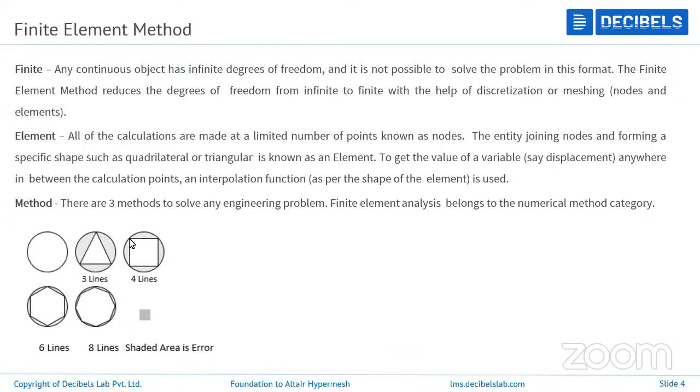For a CAE simulation to run any analysis, more than 60 to 70% of the work will be done in HyperMesh only, starting from importing the CAD. In any CAE software, we are not creating any CAD. We are bringing the CAD from software in which it was already built, the design software.

Say for example, CATIA, Unigraphics, or Solid Edge. We are importing or bringing the CAD to HyperMesh. After importing the CAD, we do geometry cleanup, the required defeaturing or simplification. There are different criteria based on the project requirement or the analysis requirement. Based on that, we are going to simplify the geometry according to our requirements.

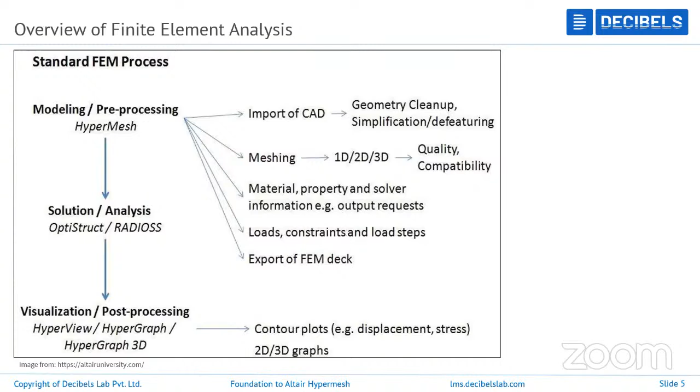This is an overview of the finite element analysis that every CAE industry is following, from pre-processing to post-processing. Next, we'll move on to why we need to do all these activities. In the past, without these activities also, we were building models, and automotive manufacturers were there. But why do we need it? What is the major advantage of using finite element analysis?

So, for example, you are doing some crash test. For the crash test, obviously, you need a prototype where everything should be as per the new car. Say, for example, you are doing some crash test for the car. So everything should be modeled as per the newly designed car.

So if the physical test or the prototype test is failing, again you need to go back to designing the CAD, where it went wrong, why it is not taking the crash load, or why it is not failing within the certain defined time range. So all these things we need to check again. After checking, if it's a fault by the design engineer, obviously it will go for a new design, or redesign.

But after the evolution of the CAE software, what we can do is we will build the model in the design software. We'll do the virtual test using the CAE software. In the CAE software, as I said, take an example of a crash test.

If you're working on the crash test, for doing any CAE simulation, we don't require any prototypes, or any physical model. What we need is the design CAD, the material data, the load conditions and the boundary conditions. We will apply all those things, run the file, and extract the results. In the CAE software itself, you will get to know the stress values or strain values, all the details.

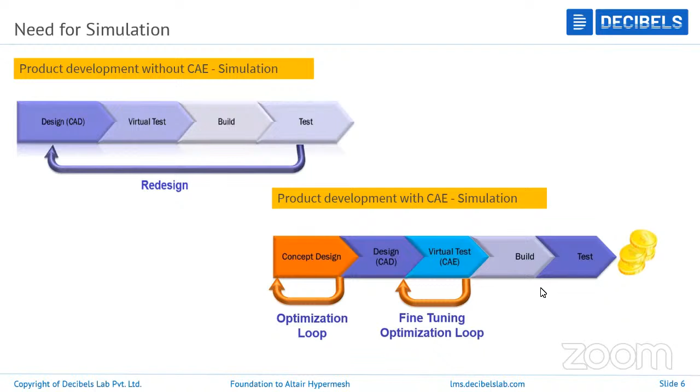Or you can change the thickness or width of the component, or change any design CAD data, or you can try redesigning the same data. Everything can be done in the CAE software only. By using the CAE software, obviously you are going to save your time, money, and manpower. These are the main advantages of using CAE.

But if you are working on CAE, you can define the different materials, and you can check the deformation plots before manufacturing: which load it can take, the displacement values and all, you can check it.

But without using any CAE software, if you are going directly for the physical test, obviously if it fails even a single test, you need to come back and redesign or change the design. Or if the materials are not good, you need to deal with that.

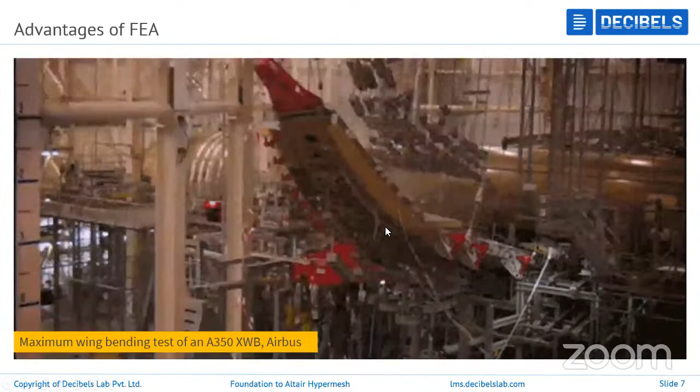Even if you are using the same steel material, there are different grades, there is a different yield of the material, so you need to check everything. But using a CAE software, that is a simulation software, you can overcome all these problems.

These are practical examples by which you can understand the main advantages of using FEA. These are the theoretical aspects you should know before doing any FEA analysis or FEA simulations. Let's get started with HyperMesh. The HyperMesh window looks like this.

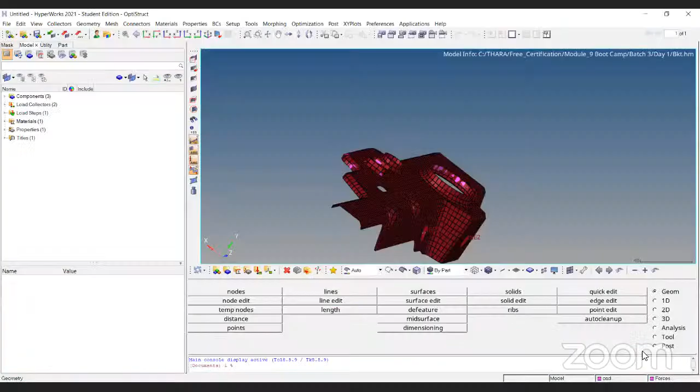As we can see, this is the title bar, these are the menu bars, this is the graphical user interface, and there are different menu pages available. When you open any HyperMesh window, it looks like this. This is the title bar. In the title bar, you can see the version of HyperMesh you are using. I'm using the 2021 version.

Below the title bar, you can see different options: file, edit, view, collectors. These are called the menu bars. In the menu bars, different options are available. If you want to create a new file, open an existing file, save, import or export, those things are available in the menu bars. This is the menu bar, and this is a toolbar.

The blue screen is called the graphical user interface. The empty blue screen you see in the window is the GUI of HyperMesh, where all your activities are implemented. If you want to change something, create elements, view a component, or do any activity, everything will reflect in this screen.

These are the peripheral icons of HyperMesh, and these icons are also available as function keys, the keyboard shortcut keys. And these are the different menu pages. As the name indicates, the best way to use HyperMesh is by the name itself; it tells us what operation it was built for.

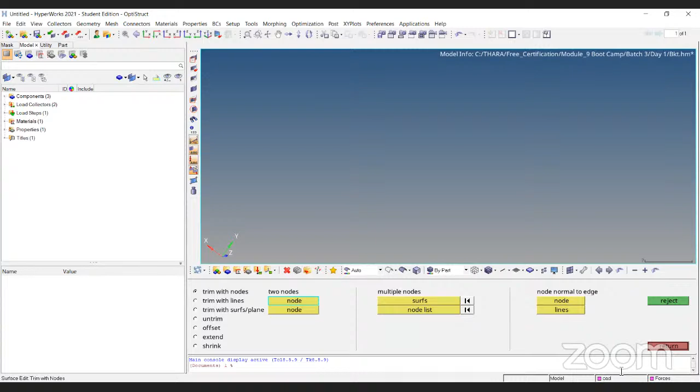These are the different options available in HyperMesh. The main thing here, on the left of this box, is called the model tree. The model tree - the main thing - like if you go for any component, this is the model tree. It contains the models, properties, materials, load collectors, system collectors, property details, any load details, control cards, everything available in the model tree.

As the name indicates, any one model, or any single component - all the details of that component, starting from the element to the node ID to the name of the component - everything is available in the model tree. This is called the model tree. The left side which you are seeing is the model tree.

If you click on anything, like the components, at the bottom we can see some options. I'm going with this first component, see, it will show the bracket name. This is the name of the bracket, this is the ID of that. This is called the entity editor.

These are the model tree. The model tree means every detail or anything that this particular file contains will reflect here only. All the things reflect here. But if you want to edit something, you can take this to the entity editor and do the activities.

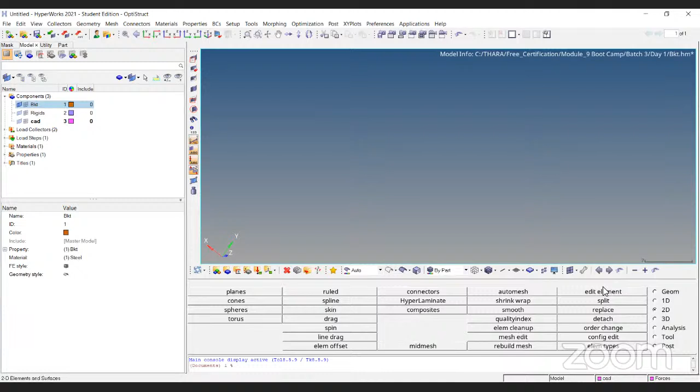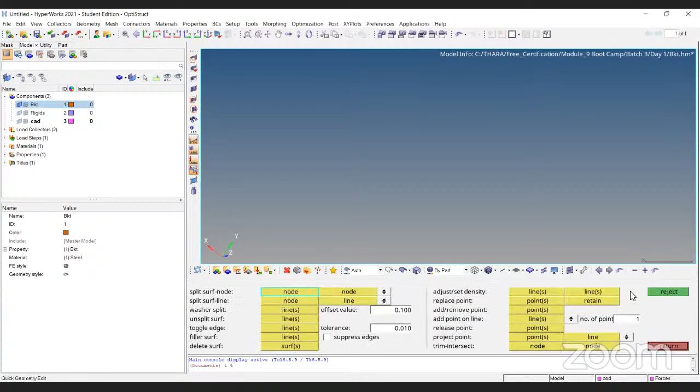In HyperMesh, there are 24 shortcut keys, starting from F1 to F12 plus Shift F1 to Shift F12. These are the main functional keys - all these operations we see in the quick edit panel are also available as shortcut keys. To do meshing, or to create or project anything, those are available in these panels, and also available via the function shortcut keys.

We'll move on to the next slide. We have learned this is the model tree. As I said, it contains the solver information, the material information, and this is the entity editor. So all these are available in HyperMesh.

What is geometry, and what are the different kinds of geometry we can import into HyperMesh? As I said, HyperMesh is a solver neutral software, so we can import from a few of the major design software packages. Importing means I'm bringing in a CAD model already built in design software. Here, the green arrow indicates bringing something into HyperMesh, while the red arrow points outward, meaning I'm exporting.

For importing, there are different options - you can import the assembly, or import only the solver deck, meaning you can import only elements, or else you can import the CAD geometry. In the CAD geometry, you can import the IGS file, the SolidWorks file, the STEP file, CATIA file, or Unigraphics file.

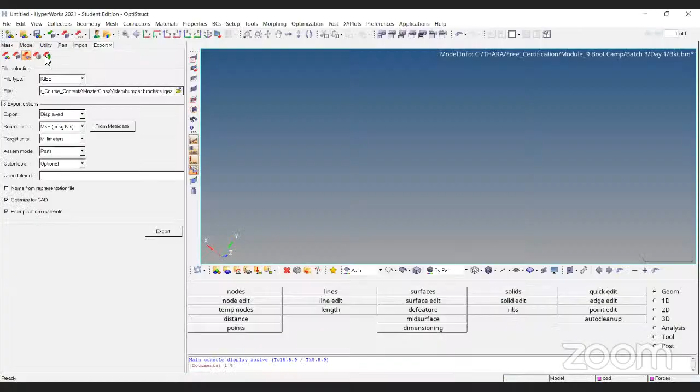As you can see, this is an empty window. I'm just opening one CAD file. This is how the CAD looks, as you can see on my screen. This is one of the simple brackets, I'm going to show you.

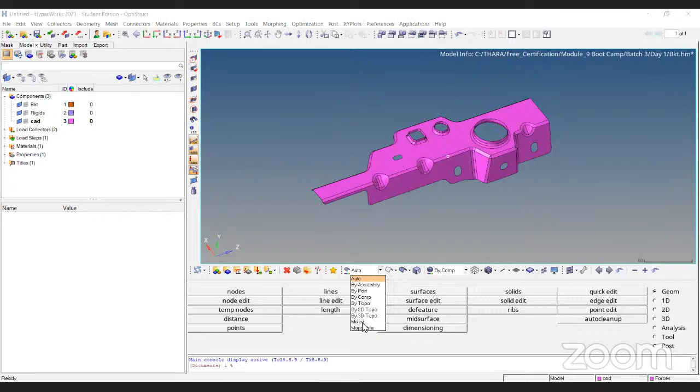I'm going to keep it in a mixed view to represent the geometry lines. As you can see here, you can see two kinds of lines: the red lines and the green lines. The red line indicates it is a free edge.

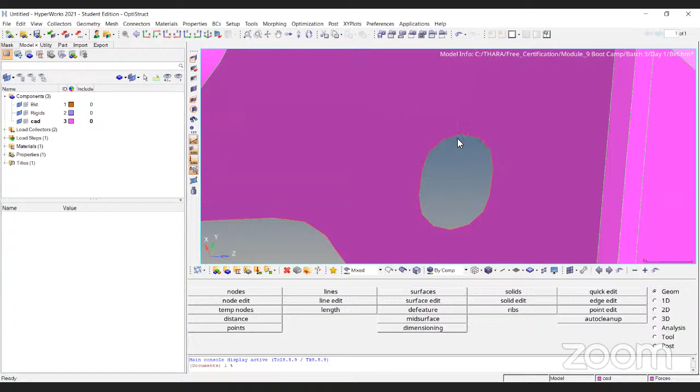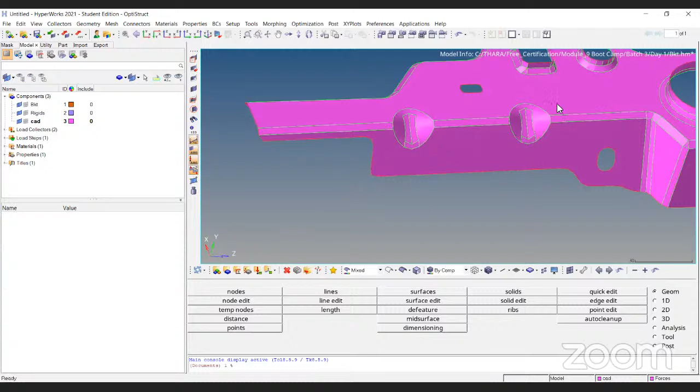This is a free line of the component, meaning inside it's hollow or empty - a free edge. Whereas the green line indicates this is shared between two surfaces. To differentiate the geometry: if it's green, it's shared between two surfaces, and if it's red, it's a single surface.

This is how the element looks. These are the elements built in HyperMesh. As I said, these are called the nodes - the yellow ones are the nodes.

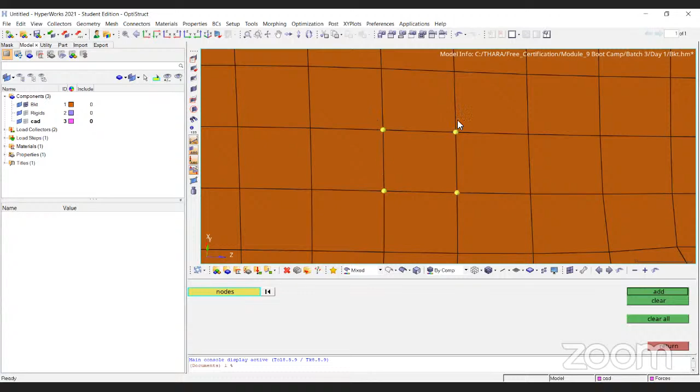This is a four-noded element, and this is a three-noded element. This is called a tri-element, which is a triangle, and this is a square or rectangular element.

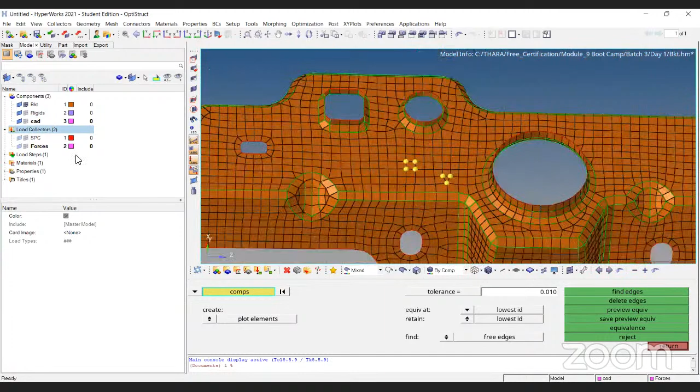If you come over here, it contains the load collector, the load steps, and a material. If you switch on and click on that material, all the details are available - Young's modulus, Poisson's ratio, and the density of the material. So every detail is available here.

First of all, we should know how to rotate or zoom the component. I'm using the control button along with the mouse right button to move within the panel area. If you use control plus left button, you can rotate it.

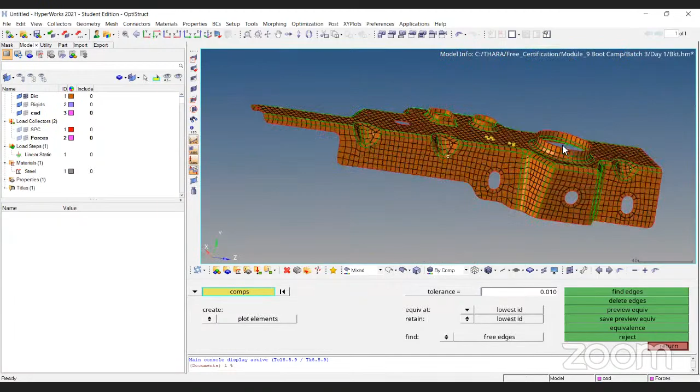You can rotate it. And if you want to zoom in and zoom out, just press the control button along with the mouse middle button. If you scroll the mouse middle button, you can zoom in and zoom out.

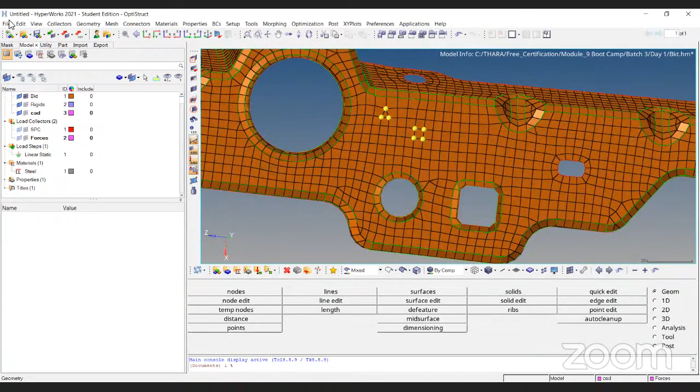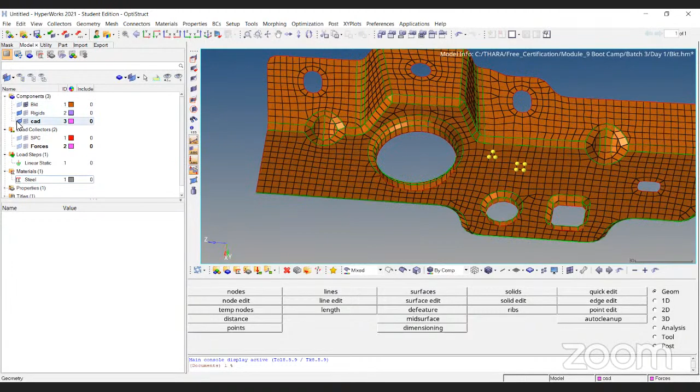Now we know how to import the file, how to rotate the component, and how to zoom in and out. You can play around with this GUI of HyperMesh. We have learned what things are available in HyperMesh and what any component may contain - this is the element view, and this is the geometry view. So all of these are available in HyperMesh.

Next we'll move on to topology. What is topology and why it is required, we'll discuss in HyperMesh only. I'll open the new file.

If you open any CAD, first we need to review the CAD thoroughly before taking it for topology correction. Topology means, as I said, we are not creating any CAD in HyperMesh. We are taking the CAD from some other design software. After taking that CAD, we need to review it before meshing. Let's see what checks need to be done.

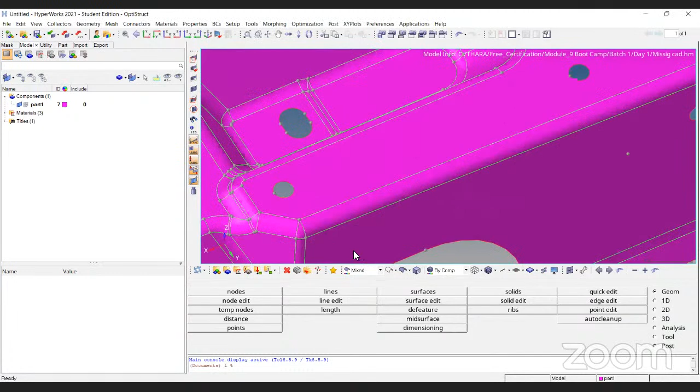I'm keeping it in a mixed view for the geometry representation. If you keep it in a mixed view, you can see what are the free edges or the shared edges. Those things we can differentiate.

In topology correction, what we need to learn is, see here, surface is missing. Here you can see some surface is missing, but I feel it is a missing CAD. Here surface is not there - it could have a valid reason that this feature ends here, but if the surface is not here, it means it is a missing CAD. This comes under topology corrections.

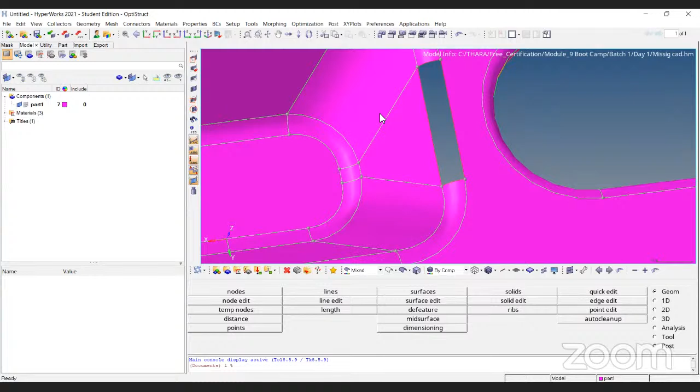Basically, topology correction means we are going to correct the geometry, or modify the geometry, or create washers, or simplify the geometry - that comes under topology corrections. We'll do some small activities using topology correction.

As the name indicates, topology means not changing the shape or changing the size. Here I'm not doing anything, I'm just modifying the geometry. See here, the CAD is missing, so I need to create some surface.

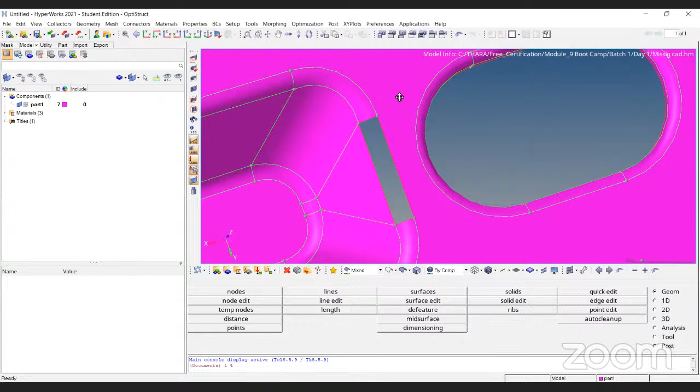Before generating the meshing also, some corrections, simplification, or modification is required for every component. Every component has to be corrected before taking it for meshing. Why? Because even if you don't clean the geometry, you can still generate elements and finish the component. But what matters is the way the geometry is - likewise only we will get the elements.

If the geometry is good, obviously we will get good quality elements. If the quality of the elements is good, the results will be as per our requirement. The results of the analysis are directly proportional to the quality of the elements. It all depends on how good the elements are - like that only you will get the corresponding results.

How will we get good quality elements? Obviously our geometry should be very good. How to get a good geometry? By doing topology correction, modifying the geometry, or making the required changes to the geometry, we will get good elements. Then good quality elements, then we can get good analysis results also. So one leads to the other - it is interlinked between one and other.

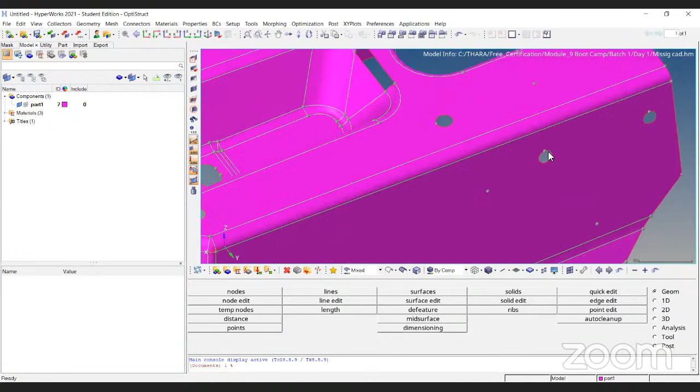So here we need to create a CAD - the yellow ones are the nodes, and the gray ones are called the points. See, there are free points here - this needs to be removed. And here some circles are there, and we need to create some circles. And here also some missing surfaces are there, so we need to create the missing surface.

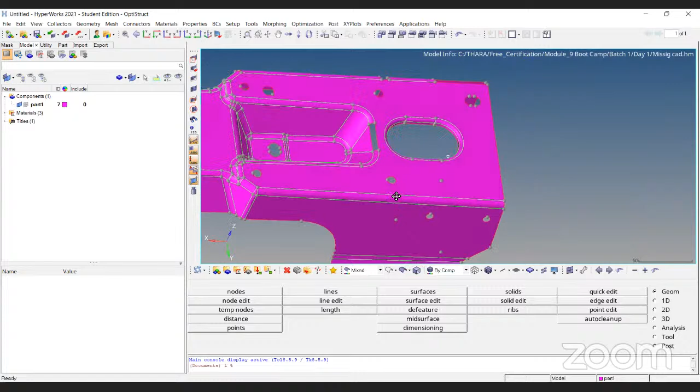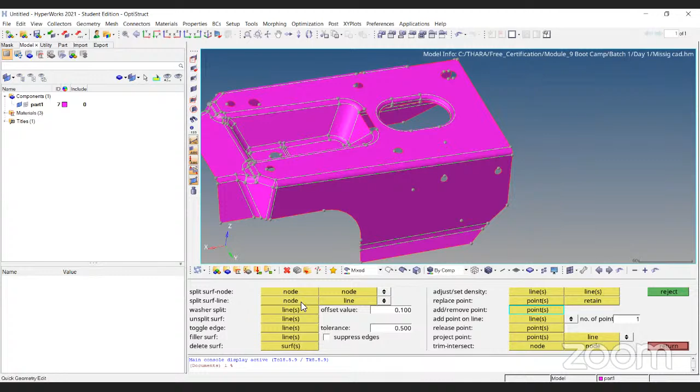Starting from split surf, I'll show you. If I want to cut this line, I just go on selecting one node and I'll do it like this - from here to here, if you want, you can do it. If you want to cut any lines, you can cut the lines like this. This works as per the node.

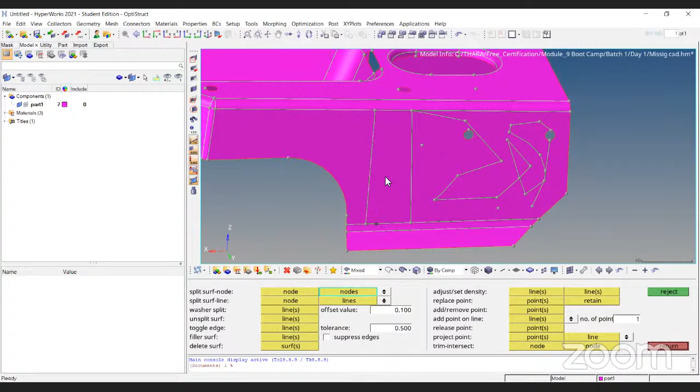But if you switch on to the lines, select a node. I'm choosing this as a node and giving the destination here - perpendicularly, it will split. But if you're selecting randomly, if you want, you can use this one. So these are the basic things we should know.

Then we'll move on to creating the surface. How to create the surface? You can go by surfacing - select the nodes in whichever axis you want, or in the global axis, or by creating a local axis. I'll create the surface using the 2D option, going to the panel called ruled. If you click on the panel ruled, a sub-panel will open. Here I'll choose a line, and here also a line. I'm keeping it so I want only the surface, so I'm switching this to surface, then choose the lines.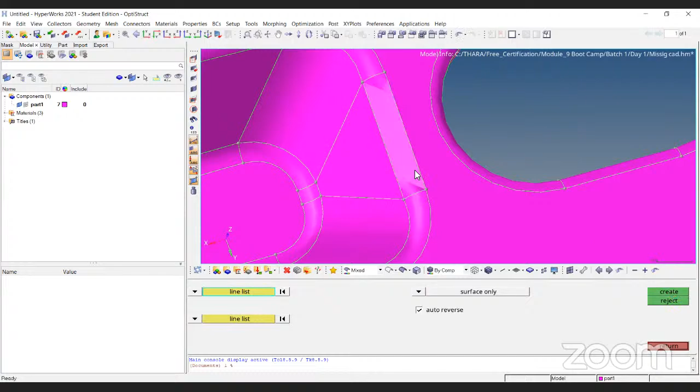Choose the lines. Choose the line list and create the surface. See, surface is created. So like this, you need to think, okay, where are the surfaces missing? You need to create the surface like this. Or if the surfaces are not missing, or if really that is a missing CAD, go by creating the surface. Or else, if the surfaces are like this, there is a valid reason that here some circles are coming.

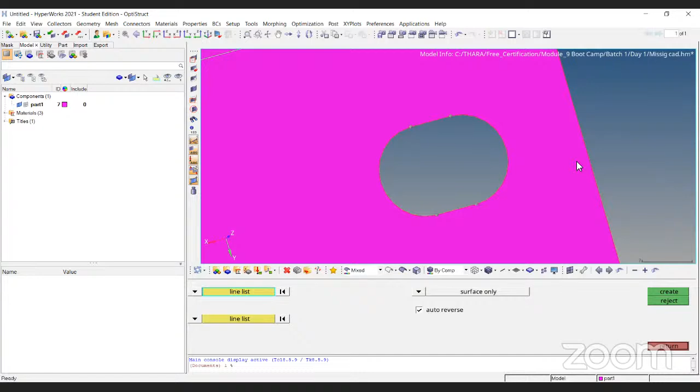If the circles are coming, it means it might be a bolt hole, where bolts may come, or nuts may come, any screws may come. Say for example, in our academics we have studied M10 bolts, M12 bolts. To represent the bolts, these circles or these holes are there. This might be a normal hole and this might be a bolt hole. But there are different procedures for the bolt holes. What that means, I'll tell you.

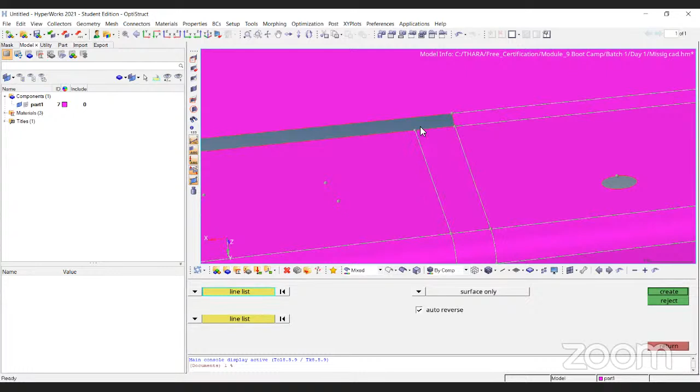See, this is how we need to create the surface. I'll finish off this one. See, like this, you need to choose the lines and you need to create the surface. See, we have created the surface. We'll move to the circle side. Say, for example, it is a bolt hole. So, how to represent a bolt hole?

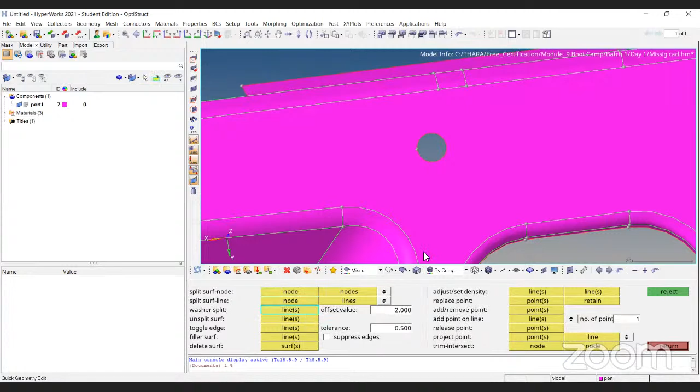For the bolt hole, we are going to create one washer. Why it is required is because obviously there are the most stresses there all the time. There is stress in the bolt. So, we are going to create one washer. So, choose some washer diameter and create the washers like this. This is an elliptical hole. This is a normal circle. This is an elliptical circle. So, wherever you want, you can create the washers.

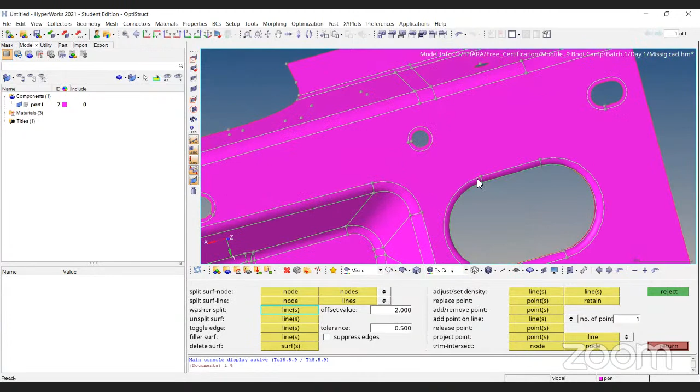So this comes under topology corrections. We have learned how to create the nodes or how to split the line. We have learned how to create the missing surfaces too. And we know how to create the washer also. Then the other important thing is how to remove the points. The same in the quick edit panel. In the quick edit panel, just keep an eye on these gray points. So you just deselect this one. See, these are not required for my meshing.

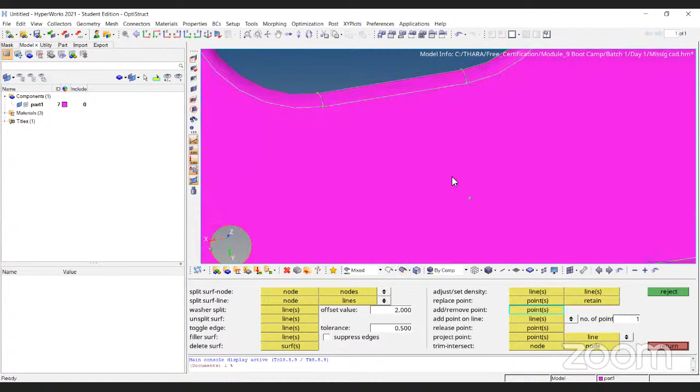I'm just removing. See, I can remove this gray one, but I cannot remove this one. Why? Because this is a free point. See, you can see this is a free point. I can remove it, but this one I can't remove. Why? Because it is connected by the line. It is not free. So these are the major topology corrections which we need to do.

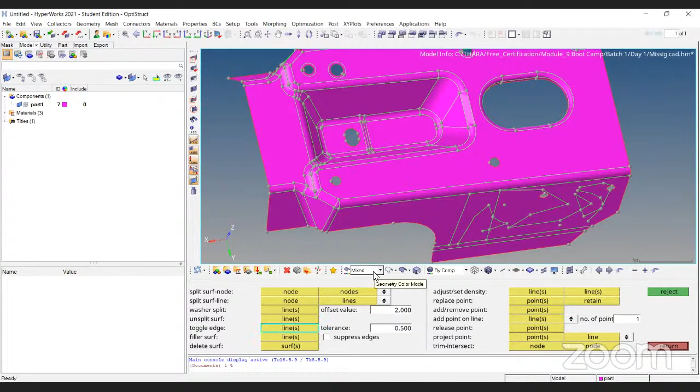And one more is the toggle option. If you click on the toggle option, as the name indicates, toggling means I'm suppressing that line. See, here we have just created this line. Now I'm just toggling this line. Just observe, if I click on toggle line, you can see some dotted lines. It means I'm suppressing the edge, or masking it, which is not required for me.

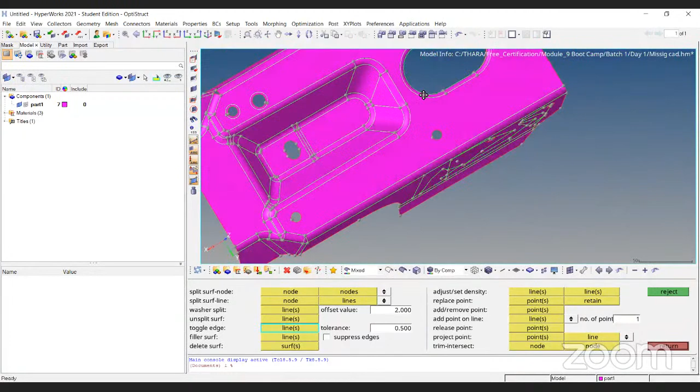Why is it not required? As you can see here, if you come to these fillets, there are too many lines. These many lines are not at all required for my meshing. So what I do, I'll just go and toggle the lines, like this, so that I can have a single continuous surface. On this single continuous surface, I can create my mesh or my elements.

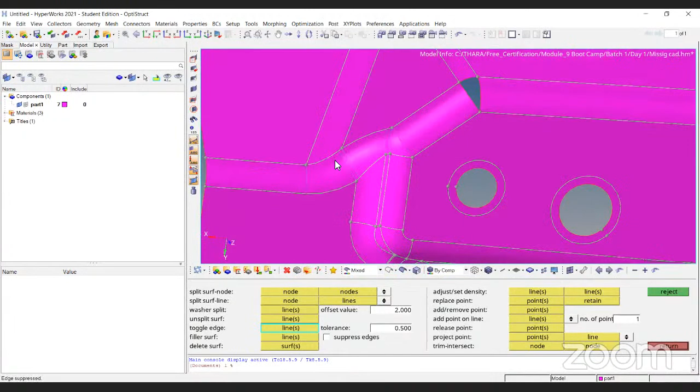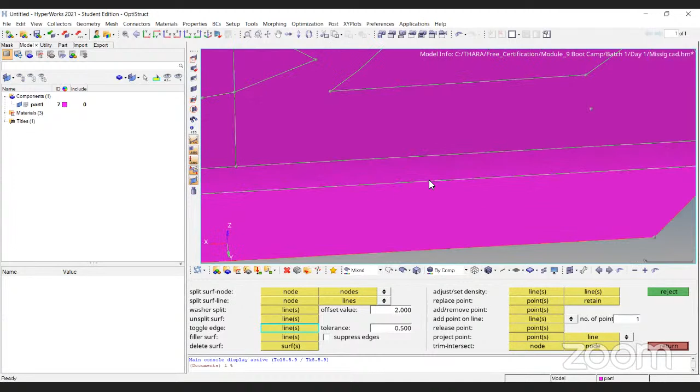And one more thing, here toggle means we are suppressing. Once it's suppressed, you can see some dotted lines. You can retain this line again just by right-clicking in the same toggle panel. Left button is for toggling the line and right button is for untoggling the line. So this is the main difference between toggling and untoggling lines.

Next comes the unsplit line. Unsplit line means, see, these are the lines I have just created. You can toggle these lines and you can unsplit the lines. You can observe it here. Here the dotted line is there. I'm in the unsplit option. You just click on this.

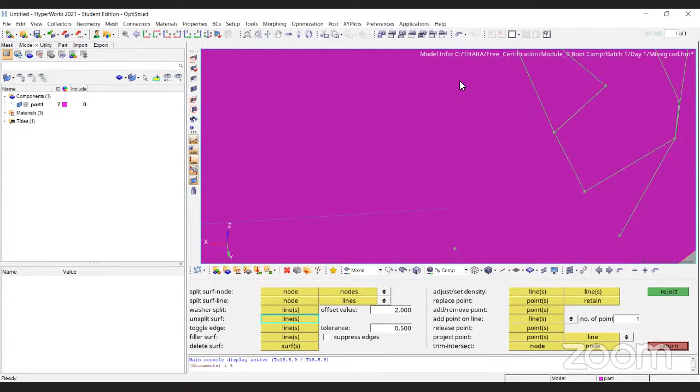It is not retaining any points. Why? Because these are lines which I have created. This is not an original CAD line. For the original CAD line, you cannot unsplit. For the original CAD, you need to toggle.

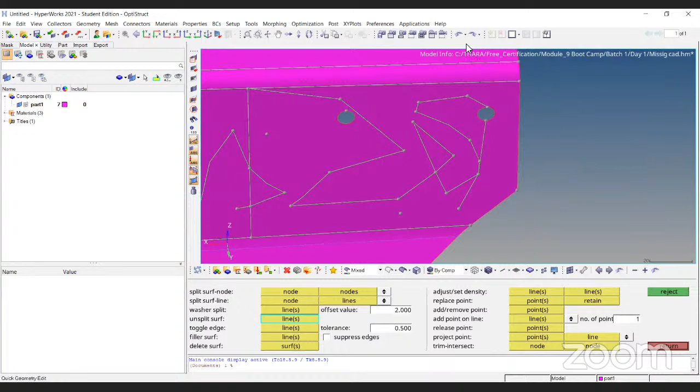For CAD like this, the lines which we have created can be unsplit, or else you can toggle the lines. And you can do Control Z for the undo option. See, here the undo option is there. You can retain all your activities back. See, these are how many times we did the corrections, and you can retain back all these activities.

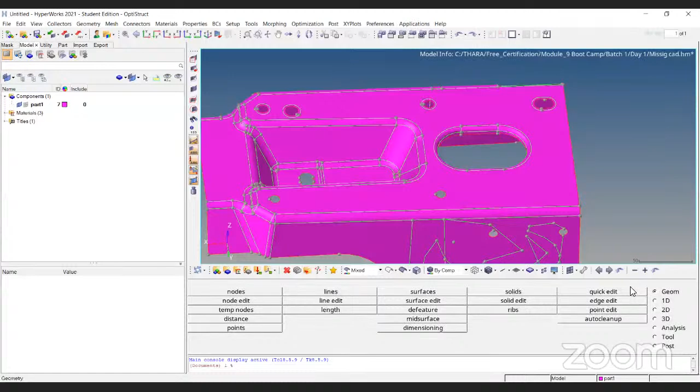So these are the main topology corrections which we need to do before the component goes for meshing. Why we are doing it, I'll show one example here. Just for example purposes, I'm selecting the surface and I'm meshing. See here, there are no distractions here. Somehow the elements are generated. We can see the elements flow and all.

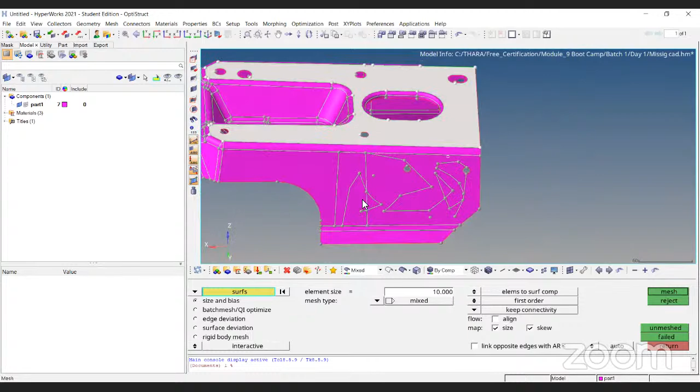But here, see, there are some abnormal or abrupt lines on the surface. If you choose this, see how the elements flow. See how the flow of elements is. This is the reason we need to clean the geometry. By cleaning the geometry, we will get good quality elements. If the quality of the elements is good, definitely we will get good results. So for this reason, we need the topology option.

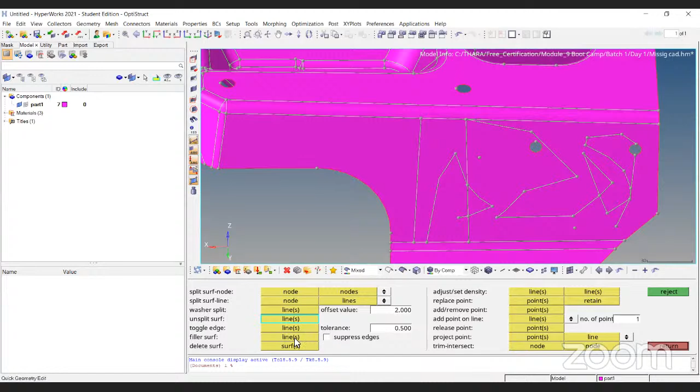The topology option is available in quick edit, and in F11 also it is available. We know how to split the line, how to create the washers, toggling and all. Delete surface is also there. If you click on that one and select the surface, automatically it will get deleted. See, it will get deleted. You just click on this one. The quick edit panel is the main panel which we use for topology corrections.

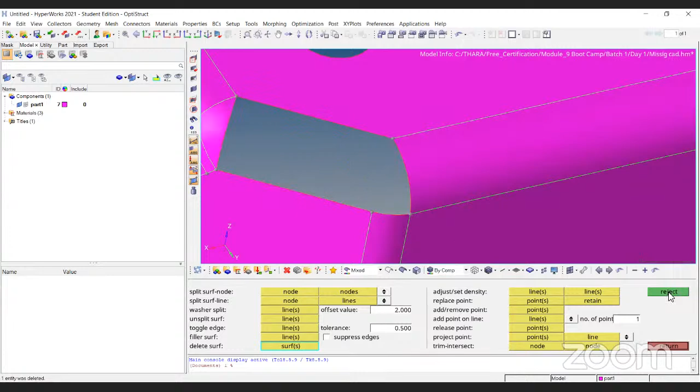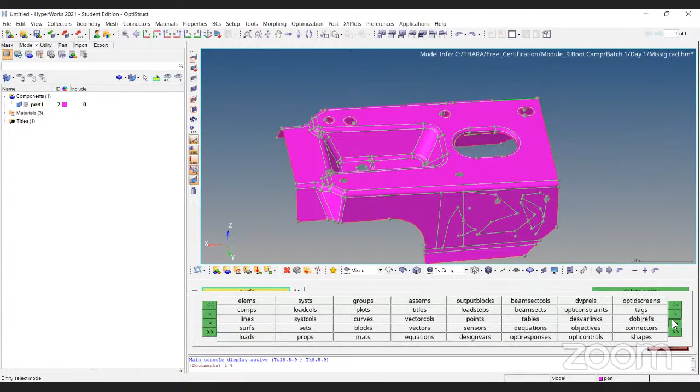You can go to the delete option, but the same delete option is also available in functional key F2. If you click on functional key F2, you can delete all these types. You can delete the elements, the components, groups, assemblies, points, tables, whatever activities you can create in HyperMesh. All these things you can delete. See, there are 2 pages. You can delete whichever things you don't want.

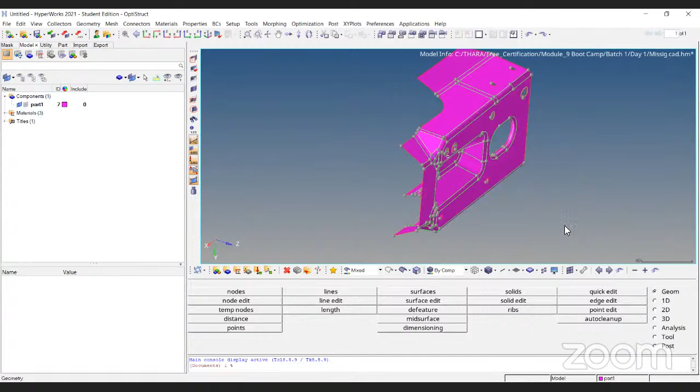Select the surface, say delete. See, the surface is deleted. If you want it back, you can do Control Z. Okay, like this. And one more: functional key Shift F1 is for changing the color. If you go for Shift F1, you can change the color of the component. Select the component. You can choose whatever color you want and set the color. So like this, you can change it.

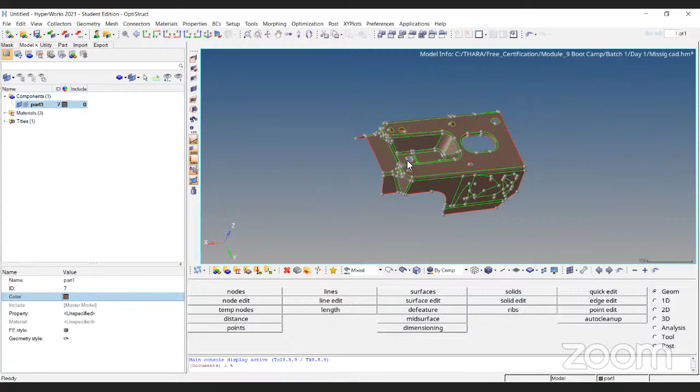Or else you can come to the model tree. Here, choose this one, and you can change it. What you are seeing is a component. The component contains the CAD and it contains the elements also. This is called the component. You can create the component here also. Say create, and you can create whatever you want, assemblies, output blocks, materials, everything. Or you can create the collectors in the menu bar too.

There are three ways to generate any collector. See, I just click on the collector. Its name is part. If you want to change the name, you can change it. See, I'm changing it to bracket. If you want to change the ID, you can change it. I'm making it 100. You can change it to any number you want. That will reflect here. Or else you can select this one, select the component, and change whatever you want. So these are the ways you can change the component.

The component means I'm collecting the surfaces, elements and nodes into a single component. That is called the collector. See here the name is component. Inside the component you will have different collectors. It is collecting the data. It might be lines, surfaces, nodes, or elements, or things like that. It just collects the information.

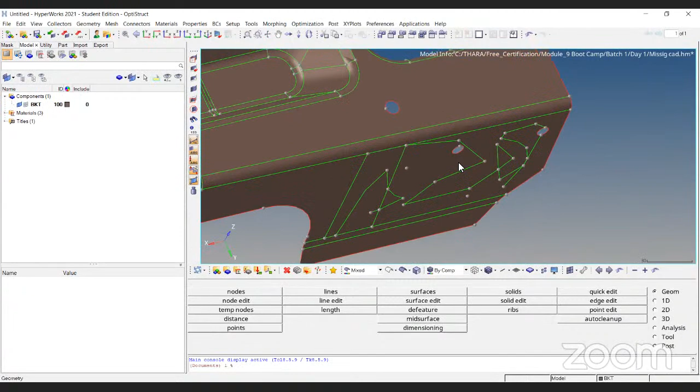And we have discussed enough on the topology correction which is required before meshing. I hope everything I discussed is useful for you guys. We'll move on to the next slide.

See, this is the quick edit option that we have seen. This is the main quick edit option to do the topology correction for any geometry, whether it might be a 1D geometry or 2D CAD. 2D CAD means plastic components or sheet metal components. 3D means the casting components. Any kind of geometry, you can work with this geometry panel only.

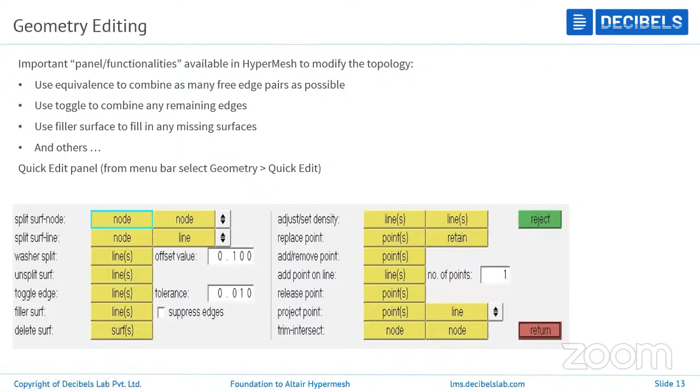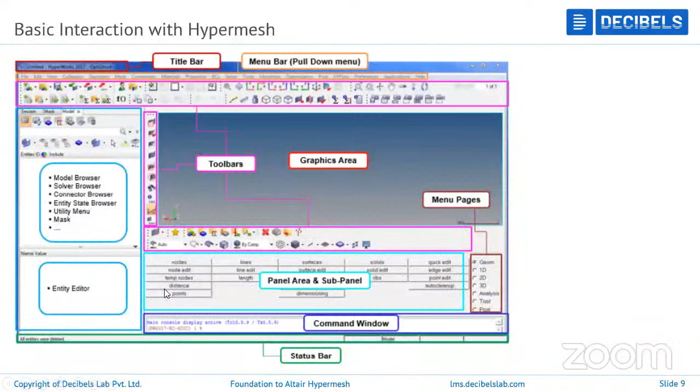And I hope what I have discussed is very useful for you guys. Hopefully I have covered the things we mentioned in module 1, from downloading the tool to repairing CAD. And if you are having any doubts regarding this module 1, you can discuss with me.